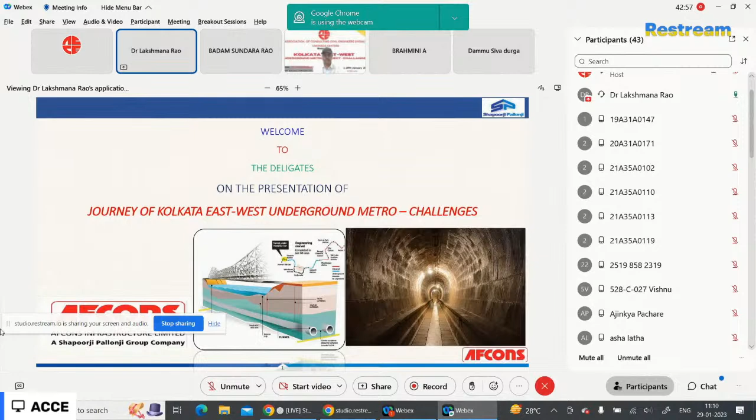This is one of the challenging projects which we have executed at Afcons Infrastructure. I will take you through a brief overview of the project and the challenges which we have faced and how we have overcome the problems.

The flow of the presentation will be the introduction of the project, the geological conditions along the project alignment, and various challenges experienced during construction of India's deepest metro station. We also experienced challenges for the tunneling below the Hooghly River, which is the first kind of project in Asia, and we executed one of the deepest mid-ventilation shafts just beside the Hooghly River. There too we faced some problems that I will touch upon, and I will conclude with the final outcome.

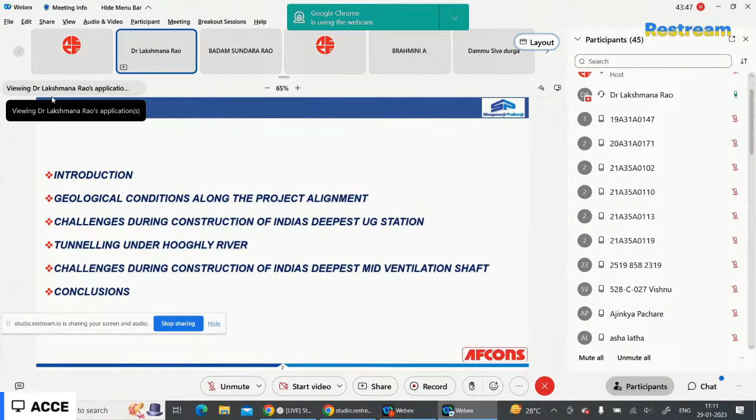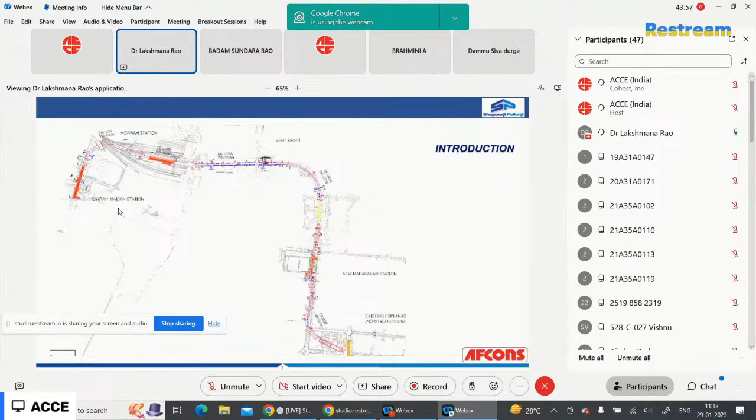If you see the project, this is the alignment in our package, which starts from Howrah Maidan to Esplanade station. This is the first scope of the project, which covers a tunnel of 3.8 kilometers each, meaning the total length of the tunnel is around 7.6 kilometers, comprising 3 stations.

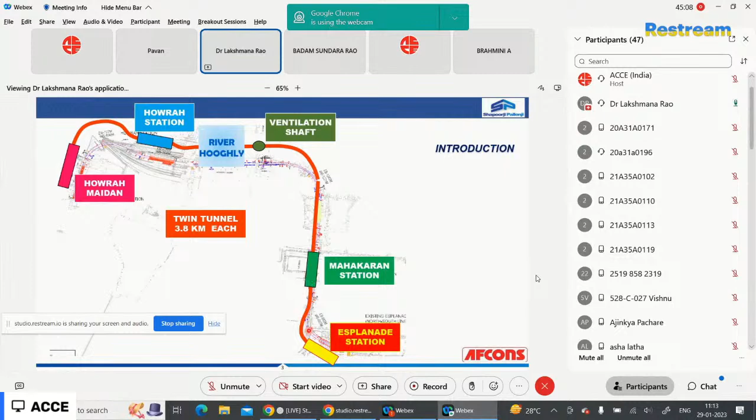It starts from Howrah Maidan, which is a very crowded area, and passes through a railway track coming to the Howrah station. Then after the Howrah station, it passes through the Hooghly River, and you can see the circular shaft, which is the mid-ventilation shaft created for emergency evacuation, because the tunnel length from Howrah Maidan to Mahakaran is far, so we needed an emergency evacuation shaft in between. The third station is Mahakaran station, and from there the tunnel goes to Esplanade. The station of Esplanade is not in our scope, but the tunnel between Mahakaran and Esplanade is our scope. So this is the brief scope of the project.

Now I will give a brief introduction of the profile. This is one of the most challenging projects we have executed, and it has great national and international attention because this project connects Howrah and Kolkata. If you are aware of Kolkata, there is only one bridge connecting Howrah to Kolkata, the Howrah Bridge. There is another bridge constructed recently that also connects Howrah to Kolkata, but the major connectivity is the Howrah Bridge.

So the rest of the people who want to cross generally use water transport between Howrah and Kolkata. This project, being underground, will connect Howrah and Kolkata, and that gives a lot of attention to this project.

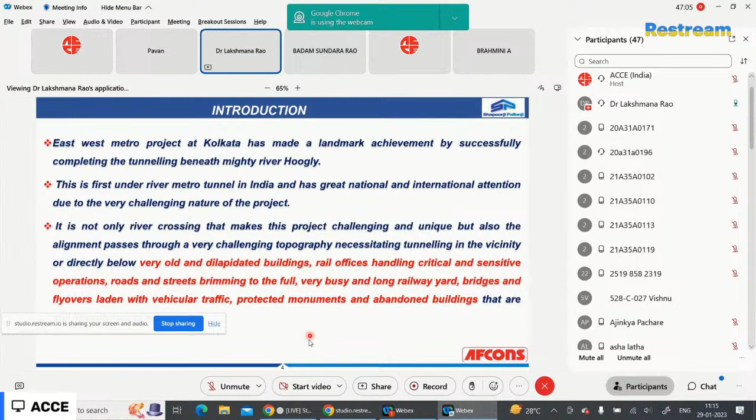Besides this tunnel crossing below the Hooghly River, there are other challenges like old dilapidated buildings. Kolkata is one of the oldest cities in India, with buildings having a life of more than 70 to 80 years. There are also heavy old railway office buildings and railway yards. Kolkata is one of the busiest railway stations, so we need to cross the tunneling below the railway track without affecting train movements. There are many flyovers and bridges below which our tunnel has to pass, and in a few locations there are heritage structures that we needed to protect during tunneling. These are the various challenges.

As I mentioned earlier, this is the first underwater tunnel which was executed in 67 days, against our planned number of days. I will explain how we shortened this time in my subsequent slides.

This is one of the deepest metro stations, having 4 floors. In general, any underground metro station has only 3 levels of slabs, covering the roof slab, concourse, and base slab. Whereas here, they created an intermediate slab for property development, because this station connects to the existing Howrah railway station, and they wanted additional space for property development. That's why this becomes the deepest metro station.

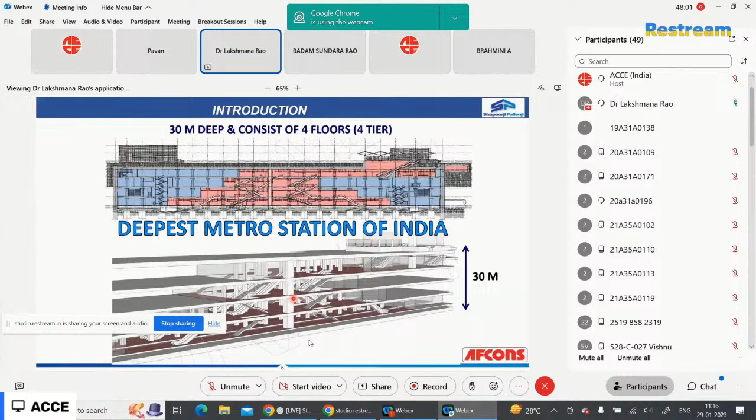Also, as I mentioned in my previous slides, this is one of the deepest mid-ventilation shafts, around 45 meters from the ground level, which we connected. The major challenge is not only the depth, but that it is very close to the river. So there is always water flow from the river to the shaft during construction activities, creating a challenge from the water egress point of view. I will explain how we overcame that.

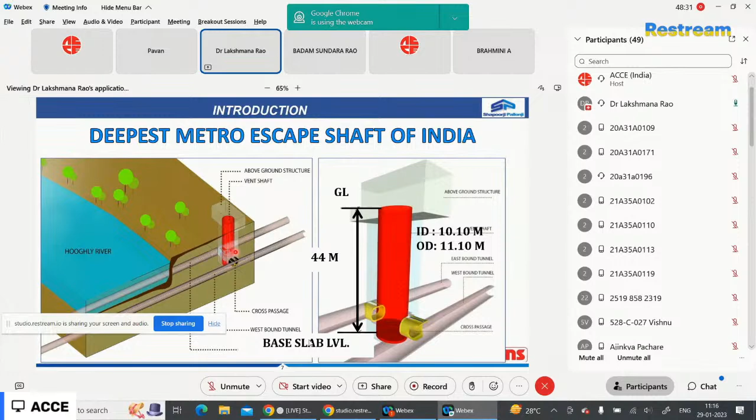Now coming to the geological profile. This is the broad geological profile, which covers very soft soils. Kolkata's groundwater table is almost close to the ground level; around 2 to 2.5 meters from the ground you will find water. Most of the soil is very soft because it is alluvial in nature.

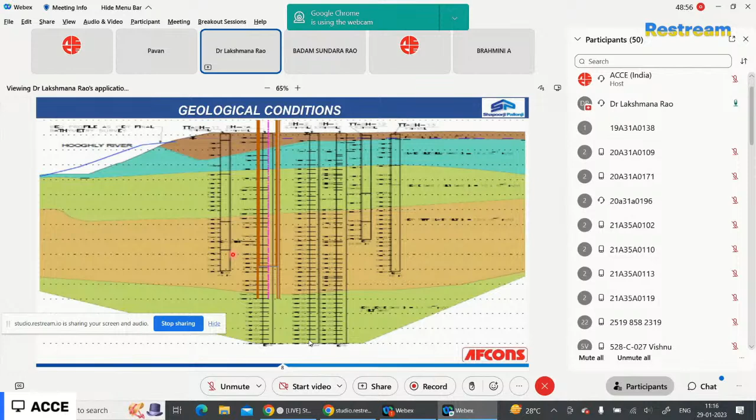Based on the tender stage investigation, we classified the soil into different layers. The first layer is made ground, almost filled-up soil in loose condition, from a depth of 1 to 5 meters, where all the building foundations rest. In the older system, there was no concept of deep or pile foundations; most foundations use strip footing with brick or masonry and no concrete, resting on the top 1 to 5 meters of soil.

Layer 2 is predominantly silty clay and clay silt, below layer 1, also soft dark grayish clay. The SPT N values range from 2 to 8 up to a depth of 18 meters.

The 2 to 8 SPT - we know that if the SPT value is less than 10, we generally call it very soft or loose soil. So here, from 3 to 18 meters, is soft soil through which we need to do our tunneling, and we have to experience a lot of settlement during tunneling because of the soft nature of the soil, but we need to protect them and move further because the alignment is fixed.

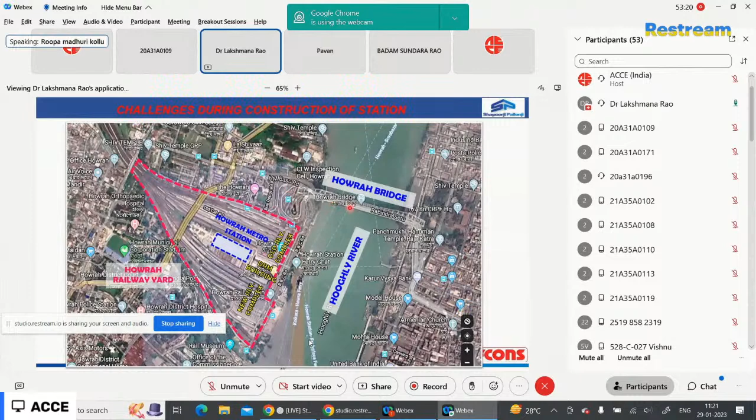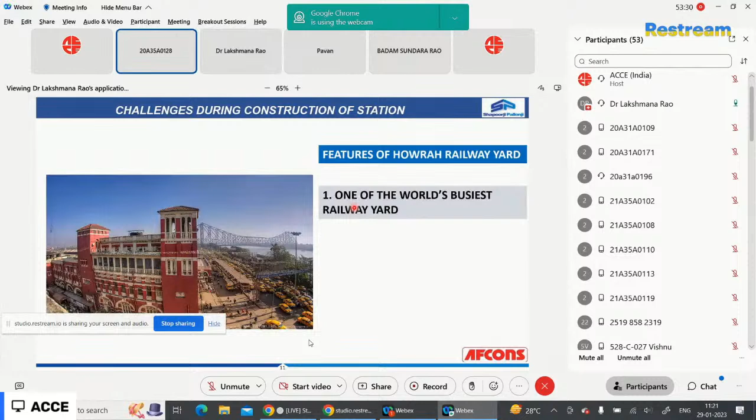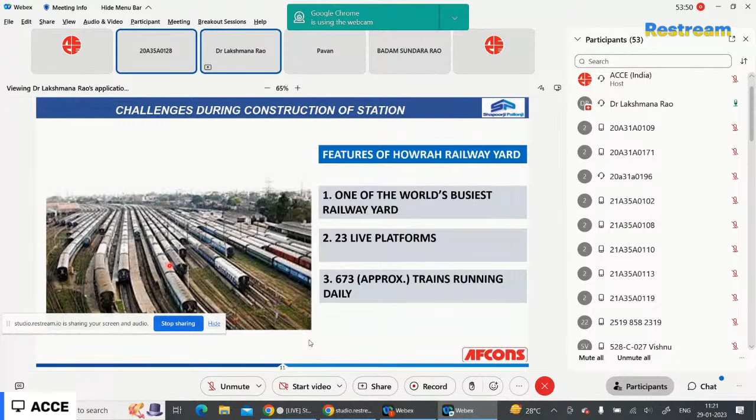Now let's see the features of the Howrah railway yard. This is one of the world's busiest railway yards, with around 23 live platforms, and around 673 trains running in a day. Imagine 673 trains means almost every minute a train is coming into the platform. More than 10 lakh people use the railway station per day, so the overall footprint per day is around 10 lakhs - you can imagine how crowded it is.

Now let's see the challenges we faced during construction of this station. The main feature is the diaphragm wall - this is the station box. These outer walls we call D walls, which will be permanent walls for the station box. These are the tension piles, barrettes, generally used for load carrying capacity during construction, and also for flotation resistance check when the station is floating, so these piles serve multiple purposes.

The depth of the diaphragm wall is 46 meters with 1.5 meter thickness. The barrette is 60 meters deep - these piles, where my cursor is moving, have 1.2 meter thickness. The piles are around 62 meters deep with 1.5 meter diameter. So all these piles and barrettes come into this dense sandy soil layer where we have a challenge in boring. As I mentioned, the depth of excavation for this station is approximately 33 meters.

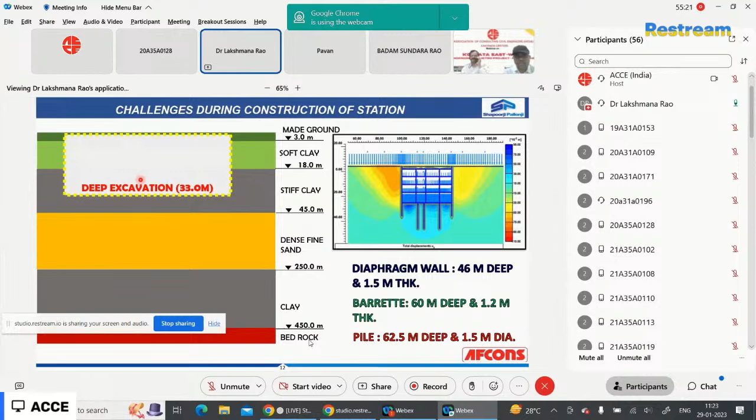So for this, the first one is that we need to make the D-wall. For the D-wall, we need to prepare a cage, like how we make the pile cage for the RCC pile. For the D-wall also, we need to make a cage.

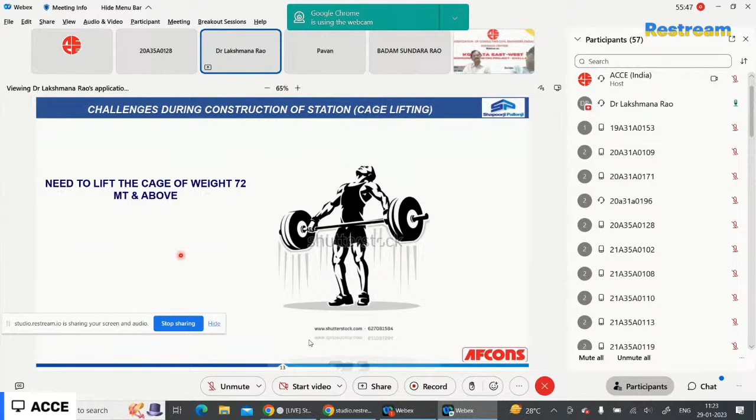For a cage of this depth, as per the design, the weight comes to around 72 metric tons. So imagine lifting 72 metric tons is a very big challenge. We also need to complete this activity within a short time cycle because the soil tends to collapse. As I mentioned, the soil is very soft, and whenever you do the grabbing, it will try to collapse. So we need to complete the activity within the time cycle.

And also we should not disturb the platforms which are existing. You can see this photograph. This is the Howrah station, Howrah metro station, which we are going to construct. These are the platforms, so we should not affect the operations or live traffic. We should complete our construction of the D-wall.

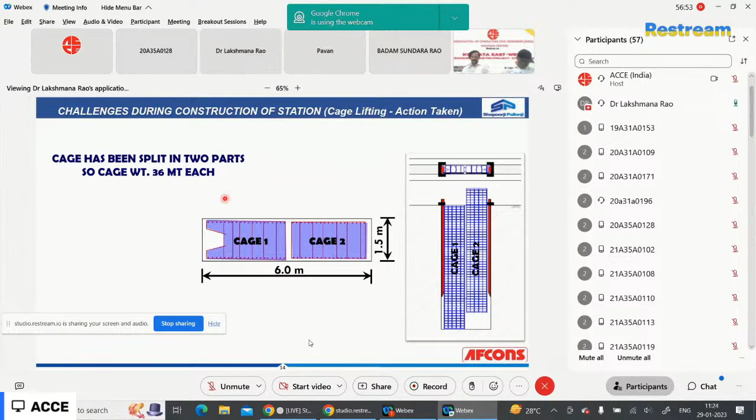So this is the typical D-wall. What we have done is, for this total 6 meter width single panel, we have done the grabbing as a single operation. Whereas when we lower the D-wall cage, we have split it into two parts, so that the weight becomes 36 tons each, which is easy to handle. We also decided to lift it as a single go.

Generally, what happens is sometimes we do horizontal splitting. Most of us know how pile foundations are constructed. When the pile length is longer, we make a cage of around 12 meters, then lower it, then put another cage and weld it. This is called splitting of the cage.

In the D-wall also, we can do it the same way. But if we do that, it will again take time for welding and all. So we decided that we will lift it as a single go. That means the D-wall depth is completely 46 meters.

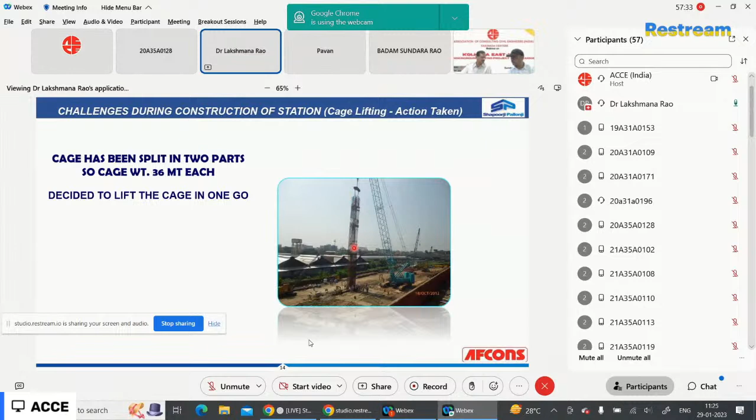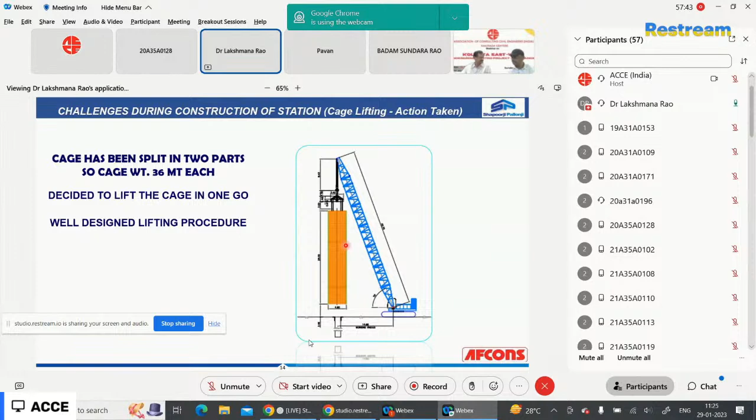So we have a well-designed procedure for lifting a single cage. For that, the required cranes have been deployed. And for the lifting procedure, you can see we have used 3 cranes to lift this - one here, another holding the cage at the center, and the third at the bottom.

Generally, what happens is we lift the cage by putting the supporting system at the top as well as the bottom. If we do that, due to the self-weight of the cage, the cage can deform. So to avoid that, we have used a third crane to support the cage and minimize the deflections.

We also selected the position of the crane such that it should not affect operations. You can see we have used only this portion of the crane's movement, and the crane is not allowed to rotate in this direction because these are the platforms. So we have the movement of the crane at this position, and here also, initially when train operations were not happening, we used to move the crane here and then we had to stop it.

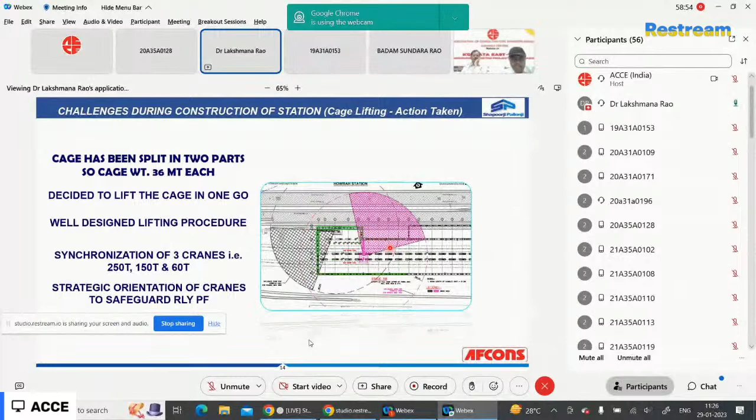Also, when we have done this complete grabbing as a single operation, then when you lower the 2 parts, it is not necessary that the cage will go straight vertically, because this trench is filled with polymer. Due to the buoyancy and all, this cage can move laterally and go inclined. To avoid that, we have used a steel pipe in the center to guide this D-wall cage to go vertically down. That way we have managed lowering the 2 cages in a single grabbing, which has helped us reduce time and also improve the quality of the work.

So these are a few pictures during the lifting and installation of the cage.

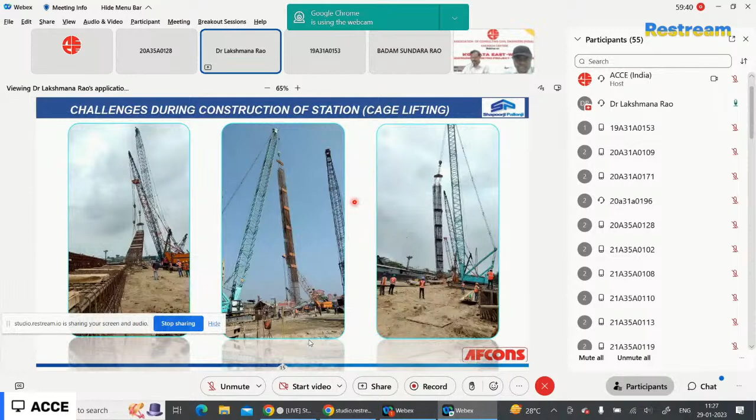Now the problem is another one - the lifting of the stop end. Because if you see my previous slides, these outer 2, we call them stop ends. Because once we do this grabbing, till we do the cage lowering and concreting, the surrounding soil should not collapse into the trench. To do that, we provide the stop ends, which will temporarily retain the soil. As soon as we do this concreting, we need to lift this stop end, which is nothing but a casing pipe, similar to that used in our piling.

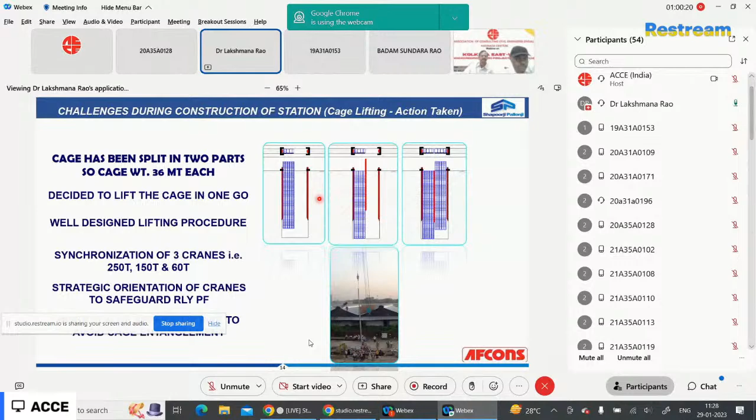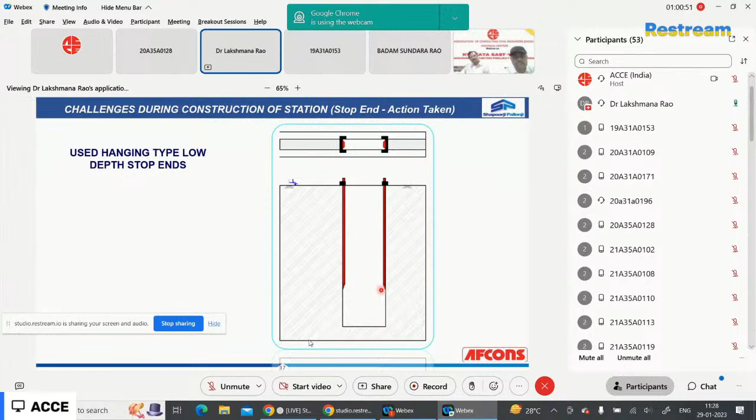Imagine lowering a 46-meter casing and lifting it back—that required a huge force to remove the stop ends. So what we did was not lower the stop end completely to the bottom, but limited it to a depth where we found stiff soil. This helped reduce the weight and the resistance between the stop end. We also used hanging-type stop ends, which you can see here as two circular pipes creating a hollow section, into which we inserted pipes.

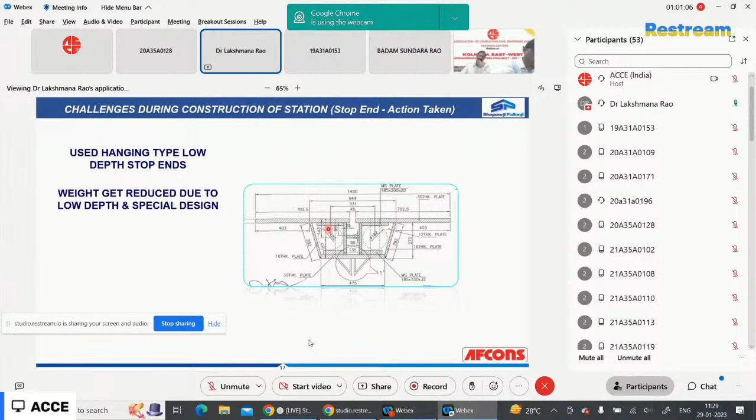Then, instead of lifting the stop end immediately, when we move to the next grabbing—since this D-wall is a continuous process, one panel completed while grabbing continues on the right side panel—we used those pipes shown earlier and laterally hammered them. Because the soil was removed and had loosened, it became easy to remove the stop end. This is the process we established to reduce the force.

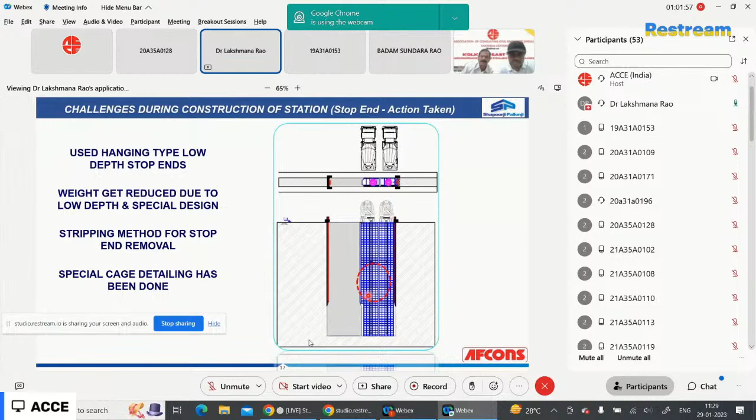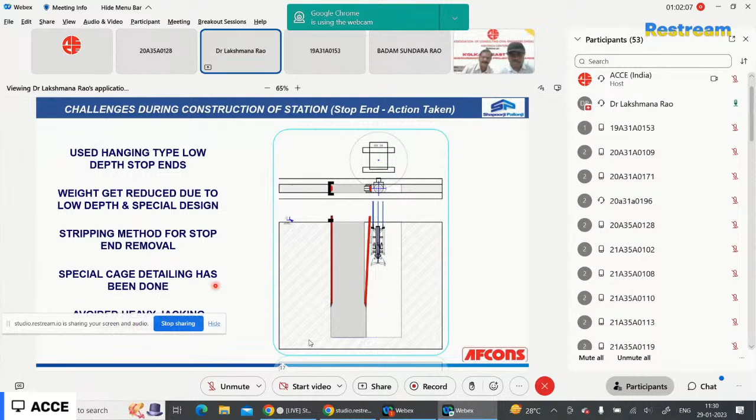We also made special cage detailing at the joints to reduce water seepage, because our station needs to be water-tight and durable for 100 years. With this approach, we avoided the heavy jacking arrangement that is generally used for underground metro projects.

In such cases, we generally provide GFRP—glass fiber reinforced polymer. But no manufacturer is available in India, so we need to import it, which takes a lot of time as well as cost.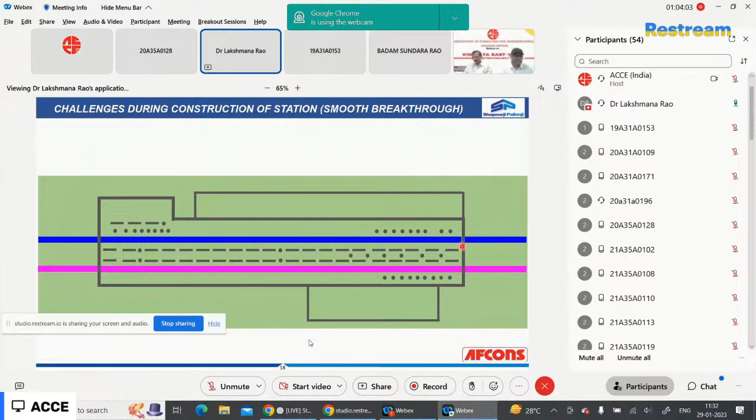Because the tunnel has to bore through the station, by the time the TBM reaches the station, we haven't completed the entire station box—only the D-walls are completed. So the TBM cuts through the D-wall and continues moving out of the station box.

In this area, we used these soft-eye panels as shown in my previous slide—we used thermocol, which is readily available, made a frame, and installed it in the D-walls. So instead of conventional reinforcement or GFRP, we simply used thermocol with a supporting system while casting the D-walls, making it easy for the TBM to cut through and move forward.

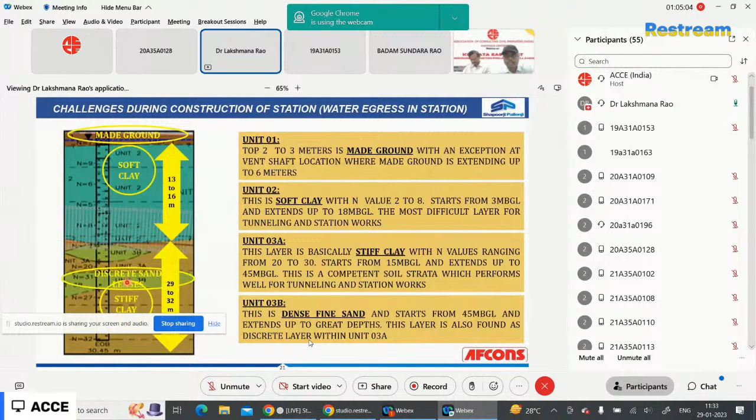Now the major challenge we faced in the station was water ingress during construction. As I mentioned earlier, within the stiff clay there are pockets of sand lenses containing huge water bodies. This is what happened when we encountered the geological profile at the Howrah station specifically.

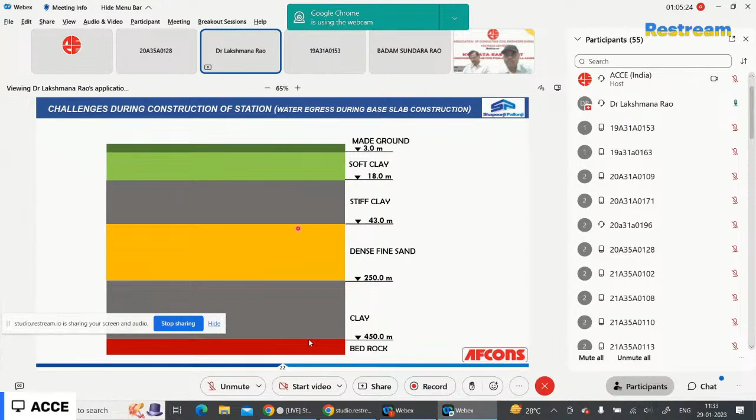You can see the soft clay, stiff clay, and dense fine sand layers—our station box predominantly sits in the stiff clay, whereas our D-walls, barrettes, and tension piles go into the dense fine sand. This is the schematic view of our station box excavation.

Due to this dense fine sand, there is a confined aquifer applying upward water pressure. As I mentioned, the water table is almost close to 3 to 5 meters from ground level, and since it's close to the Hooghly River and this layer connects to it—something we hadn't anticipated during the investigation stage—it created a lot of hydrostatic pressure on the base. We know that in terms of geological parameters, this thickness of clay layer may lead to heave.

So this is the groundwater table, as I mentioned, which is almost 1 meter from the ground level. Now see this circular portion where I marked it. This is critical, because whatever the upward force is coming, the downward force is not sufficient. So at this junction, the buoyancy effect is acting more.

So when you calculate the resistance, the dead weight versus the upward pressure, which is less than 1. That means the moment if I excavate up to this level, this soil will collapse and all the water will come into the station.

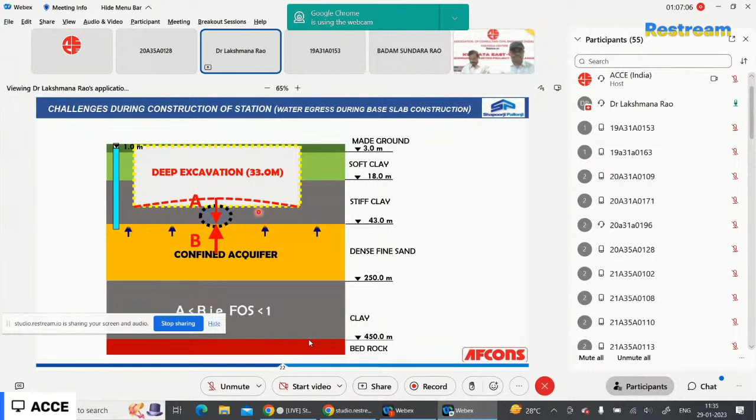So this is what we have in our design assessment initially. So to overcome this, as I mentioned earlier, heave will form like this and the soil will fail and collapse. So to overcome that, we have designed dewatering wells, which will dewater the groundwater so that the water table can reduce and the buoyancy effect can be minimized.

So for that, we have installed 18 dewatering wells and started pumping. The dewatering has been done almost 6 to 7 months continuously, but not a single meter drop of water we have observed in the bore wells.

So we keep on dewatering, but there is no drawdown expected. We were surprised why it is happening, because we have used pumps of almost 15 HP, 20 HP capacity, but still the water table is not reducing.

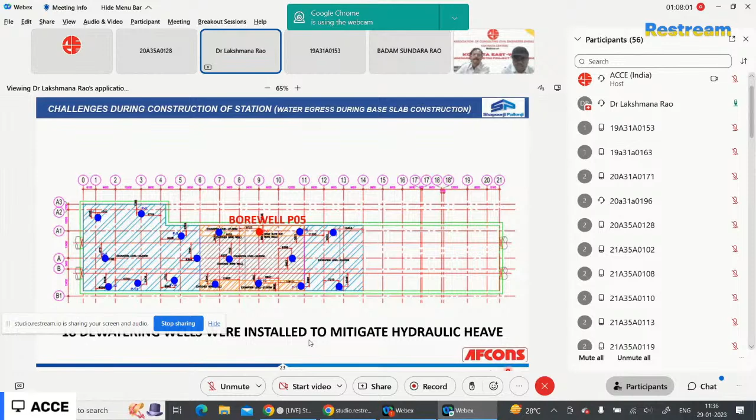So we decided, okay, let's go ahead with the construction. Then we started excavation and we have completed the concourse slab. Then we found that once the excavation goes below the concourse, it will be a problem for us. So this is the lower concourse level and this is our base slab level.

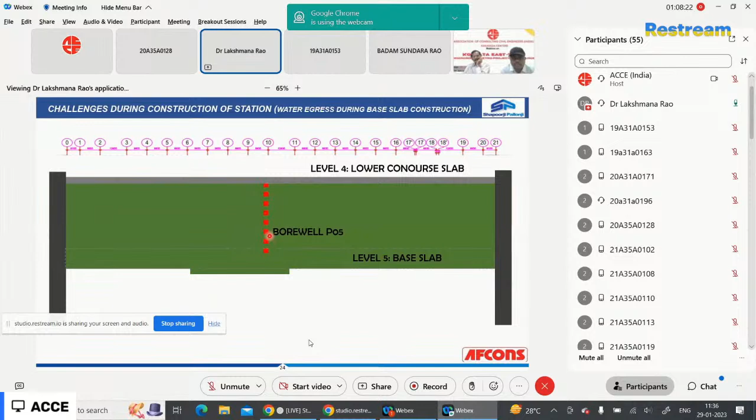So this is the indicative borewell which we have used for the dewatering. We have done the excavation up to almost close to the base slab level. Then we have gone for further excavation.

Then what happened? Suddenly there was a water egress, and this is the condition of the station. The entire station is flooded. The water ingressed suddenly from the bottom as we expected, and it flooded the station completely.

So immediately we don't have any other option of what to do. There is no further thought process. So immediately we backfilled with concrete and brought it back to the original position. So this was the challenge.

So now we have gone back to the assessment of why this sudden water ingress happened. We carried out a technique called RCA analysis. In this we found that the bore wells failed because we kept on dewatering, but there was no drawdown expected. So what could be the reason? One reason could be high water flow, and another reason could be incorrect permeability estimation.

Generally, we always calculate the laboratory permeability as vertical permeability. But in soils, there are two kinds of permeabilities: one is vertical, another is horizontal. In this case, the horizontal permeability is higher than the vertical permeability.

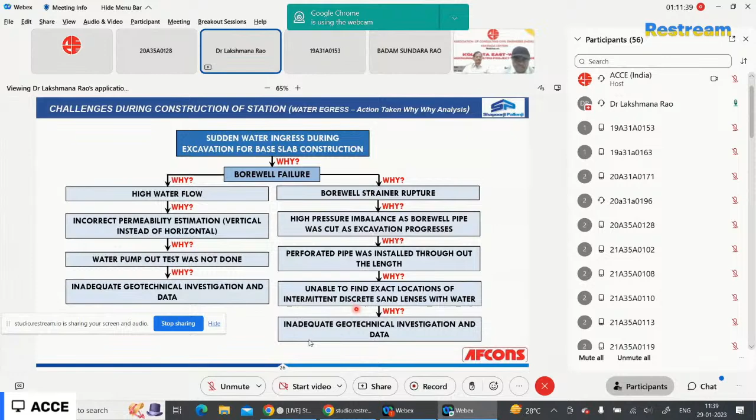Then we have carried out almost 12 to 16 boreholes in and around the station box. We did detailed soil sample collections and tested them in the laboratory for various parameters. Then we made the final geological profile assessment.

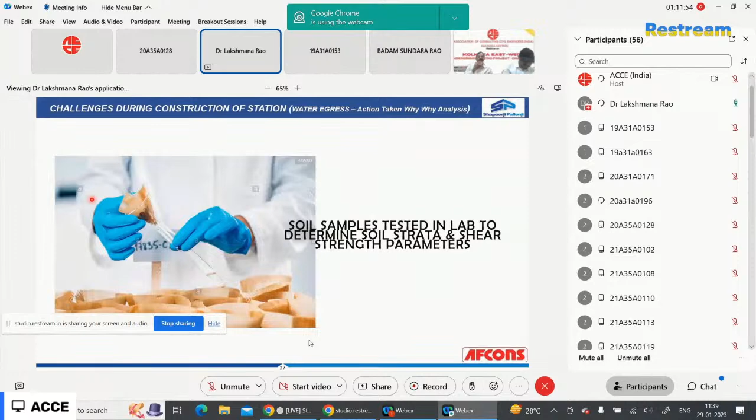If you see here, earlier the bottom of stiff clay is 43 meters as per the tender stage investigation data, whereas in our actual investigation we found it around 47 meters. So there is an improvement we gained of around 4 meters, which helped reduce the confined aquifer compared to the tender stage. So this is the one identification we have done.

Now we have calculated the factor of safety assessments in both cases. So here it is less than 1.

And also, earlier when we calculated the heave calculations, we had not taken into consideration the shear strength of soil, because there is a bond between concrete and soil. Unfortunately, our Indian codes don't say that you have to take this into consideration when calculating the heave. So we went for international references, and we found in a German code they have given the provision that you can take the contributory shear resistance of the soil while calculating the heave, because if the soil has to heave and fail, it has to break its shear resistance. So that also we have taken into consideration.

With that, we found that the factor of safety is more than 1. We don't require any dewatering wells, because the major problem happens once you do dewatering - all the wells get punctured through this clay layer into this confined aquifer, which has high groundwater recharge. So we decided that no dewatering is required, and we can go with the construction as normally we do.

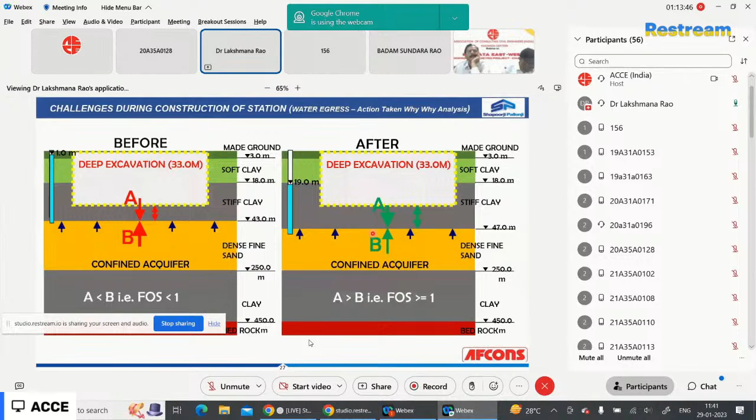So now the challenge is how to plug the bore wells. We have done 18 numbers of bore wells, and through these the water is coming. So we decided to plug the bore wells. To do that, whatever stones we filled in these dewatering well pipes, it was throwing them out because the pressure was too high.

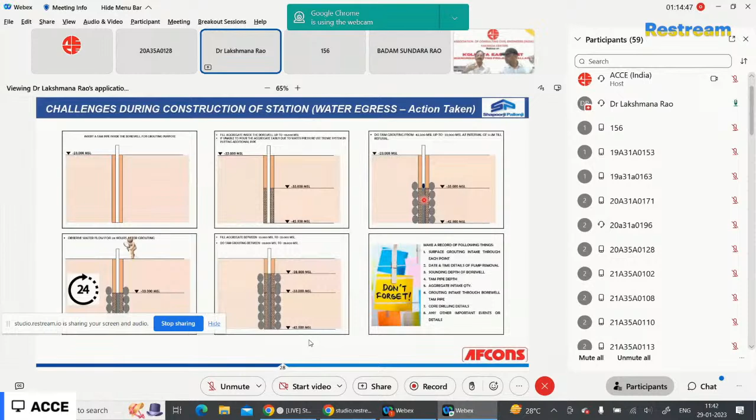So after that, we have started with our excavation procedures. You can see the right picture is the original problem where the water ingress happened. After we plugged all the bore wells, this area is completely dry. The left picture shows that the excavation can be done without any dewatering wells.

So we have taken a small patch of a small portion of the base slab, and we excavated up to the base slab level, and successfully completed the base slab.

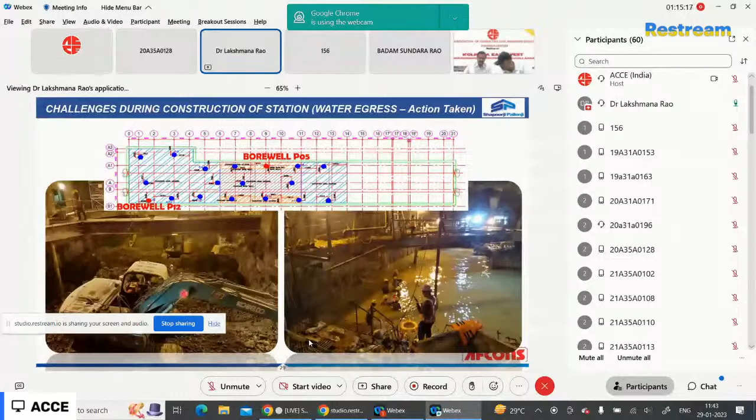Based on the original dewatering system and ground improvement plan, with dewatering wells and all, the planned duration was around 280 days to complete the entire base slab. Whereas, due to this plugging of the bore wells and by re-engineering, we decided that dewatering is not required, so we took up the base slab excavation and completed it within 189 days, which helped us in a reduction of time by 32%. Heavy pumping system was avoided, subsurface drainage was also avoided, and most importantly, the slushy condition at the base slab level was completely eliminated, which helped improve team morale.

So with that, you can see approximately 53,000 cubic meters of excavation, 2,700 metric tons of reinforcement fixing, and 16,700 cubic meters of concrete we have done in almost 6 months time in a difficult situation.

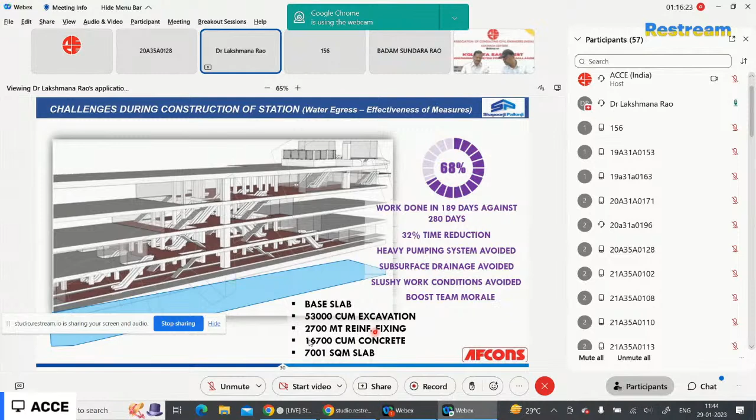Now come to another challenge which we faced at the construction of the mid ventilation shaft.

So initially we thought we would do this as a well sinking.

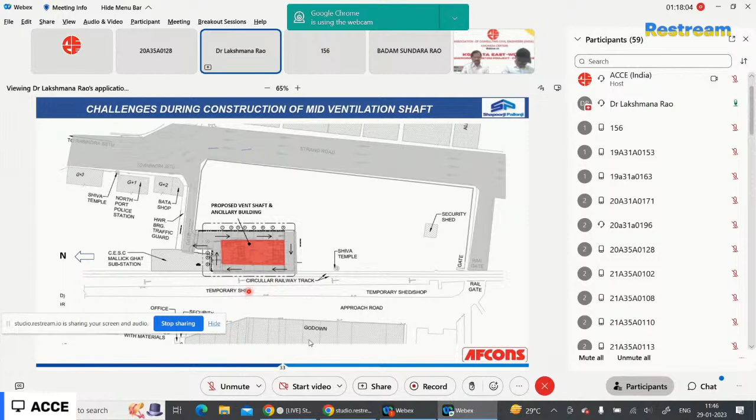So initially we thought we would go with well sinking. But we thought that for well sinking at 45-50 meters deep, we were not sure about the verticality - if there is a small tilt or anything happens, our tunnels will be in problem because the tunnels are very close to this shaft.

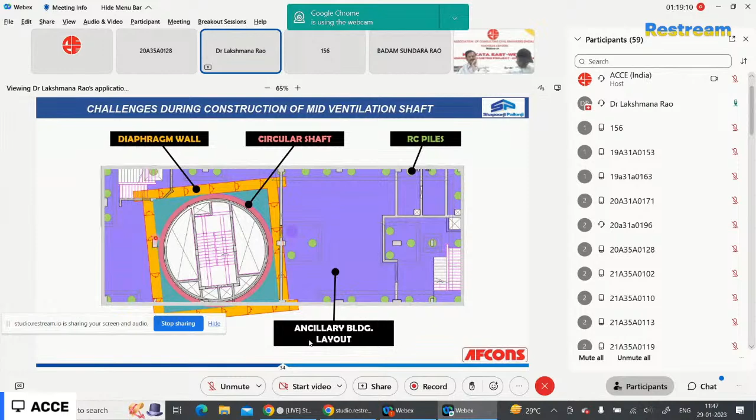However, because that given land was an old factory or workshop, we were unable to do the D walls as planned. If you see, it's a perfect square shape. But during execution, there were some boulders found in this area. We were supposed to go straight but were unable to, so we took the D wall panel backside. Similarly, at this junction there were again boulders, so we were unable to do the D wall till the required depth. So we made one backup panel on the backside.

So with the experience of our station, here also initially our thought process was dewatering wells, but we eliminated that. Instead of making the dewatering wells inside, we made them outside this time, so that it will not harm anything even if we do the dewatering.

Now the challenge is that, as I mentioned earlier, there was a slight gap between the D wall joints, and through this, when we started excavation, water with soil came into the vent shaft and it got completely filled. There was a huge settlement at the railway track on this side, almost 300 to 350 mm. So that was immediately restored, because it's a live track and we cannot stop operations. So we backfilled this shaft till ground level.

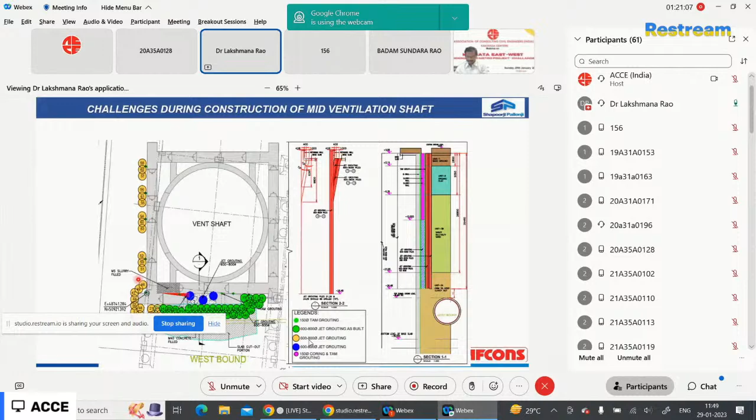Then we established a checklist. One, the pumping wells should be outside only, not inside. And we keep monitoring the standpipe piezometers. These are all the preventive measures we took to avoid problems. We continuously monitored the heave in terms of settlements and monitoring points, and we installed CCTV cameras inside.

We maintained videography at the shaft after every lift of excavation, with minute-level examination of the D-wall face. Whenever excavation happened, we used to see whether the surface was wet or dry. If wet, that indicates water percolation, so immediately we need to apply shotcrete. We also measure the water content and shear strength of the soil for undisturbed samples, and we stocked soil nearby so that if anything happens, we can immediately backfill the shaft.

And we have made one water line from the Hooghly River, so that if any incident happens, we can fill with water also. Since we cannot stack sufficient quantity of soil nearby due to shortage of space, we have stored water instead. For that, we have done a pumping line from the Hooghly River.

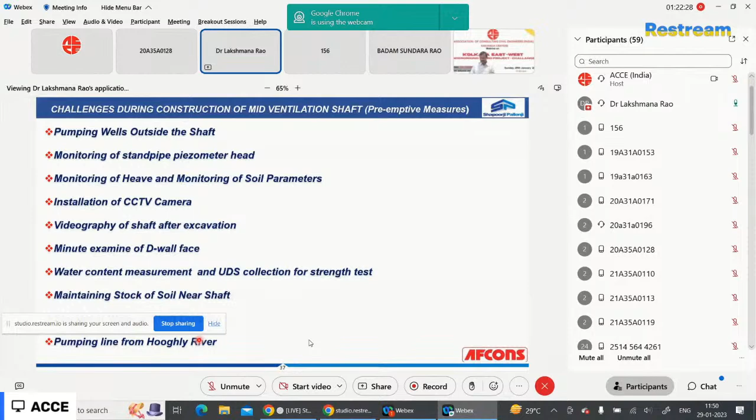So with this, we have started the excavation further. You can see this is the top down view. As I mentioned, these are the lifts of each circular ring, and the condition is dry. We used to check the in-situ shear strength, and also apply shotcrete at every phase of excavation.

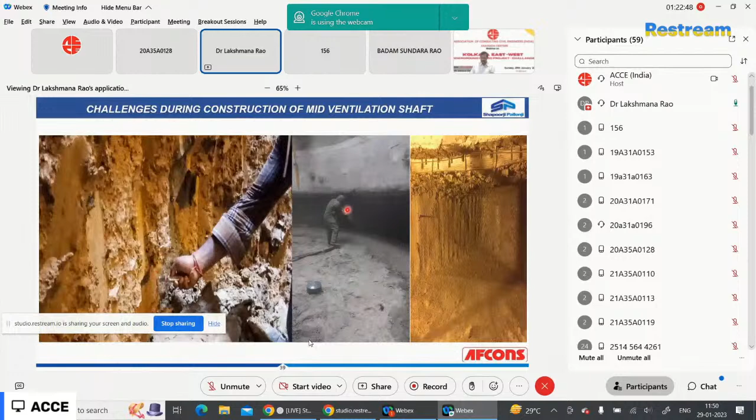Then this is halfway. This is the picture where water ingress happened and flooding occurred. So after that, we established this method.

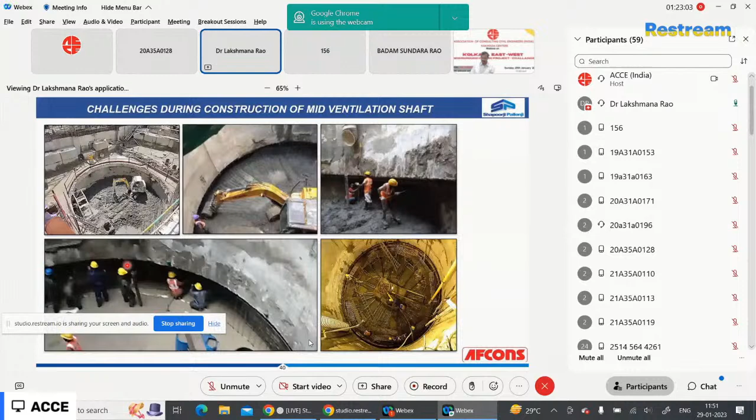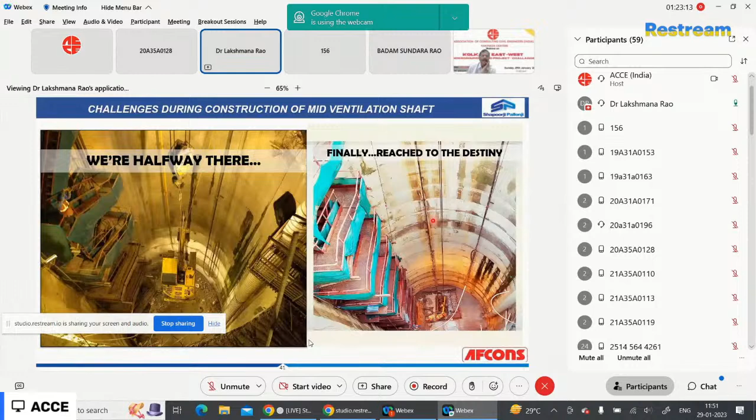Then this is halfway, and this is the completion of the ventilation shaft, 44 meters deep. This was also tweeted by the ministry, because this is the deepest metro ventilation shaft, almost equal to a 15-story building. With these difficult challenges, this was completed.

Now coming to the tunneling below the buildings. See the condition of the buildings. One side we have the challenge of poor geology, as I explained, along with old and dilapidated buildings, and crowded roads and streets. And the challenge is that we need to do tunneling below the Howrah railway yard.

When you do tunneling below ground for these kinds of soils, we used to expect settlement in the range of 35 to 40 mm. No railway will allow settlement of 35 to 40 mm, because if there is differential settlement between the two rails, there can be toppling of the train. And if there is longitudinal settlement, the capacity of the engine may not be sufficient to pull the train. Of course, since the train is coming into a platform, the speed can be limited.

That is the only benefit we got, but settlement is a challenge for us to control. And there are heritage buildings, and flyovers below which our tunnel has to pass, and you can see the traffic on the flyovers.

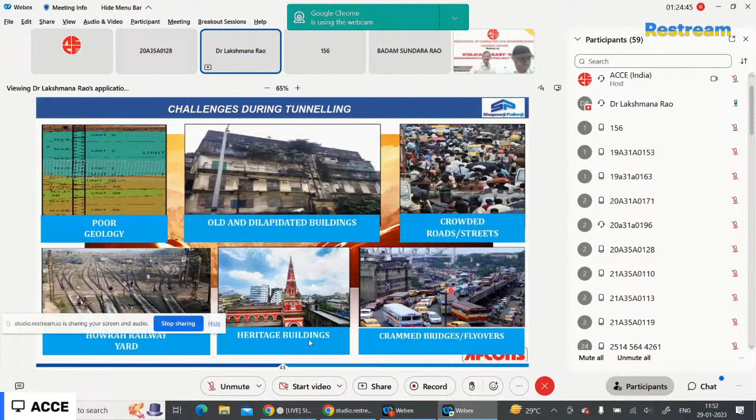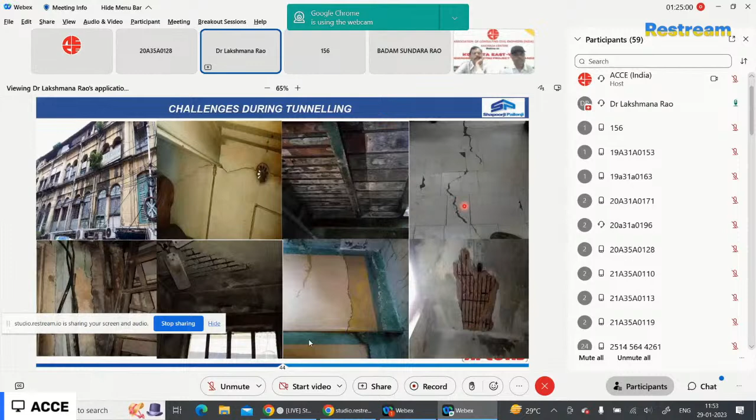So the major challenge we experienced is at Kelvin Court, where all the railway IRS officers used to stay. And as I mentioned, the railway yard and the DRM building, again, it is 90 years old. And then tunneling below the Hooghly River.

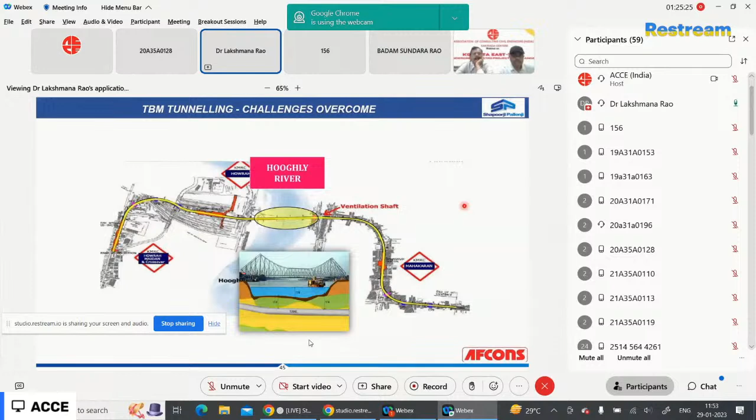Then the flyover—so these are heritage structures. It's not that a small stretch of tunneling is easy for us. Everywhere, for every 100 meters, we have a challenge.

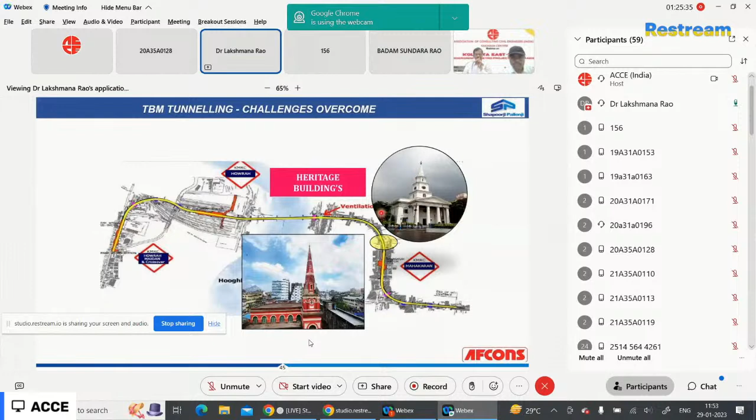So what we have done is establish 5 key parameters. This we have established for tunneling below the Hooghly River also. One is that tunnel flooding condition may happen during tunneling, and if any leakage scenario may happen during tunneling below the Hooghly River—the geology is another challenge. And we decided to do non-stop mining.

For any soft soils, the first and prime importance is that we should not stop tunneling. The moment we stop tunneling, it will lead to more settlements. So we have to ensure continuous mining. For that, we need to have preparation works in advance, and a proper crew deployment pattern. So these are the 5 parameters which we targeted to have smooth tunneling in the soils as well as below the river.

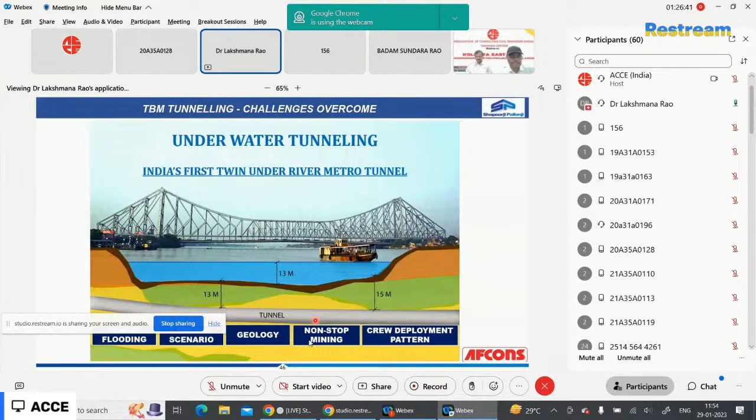In terms of tunneling, we have done the cutter head intervention beforehand, because once we start tunneling below the river, we cannot go for any cutter head intervention. If you do the cutter head intervention, we need to stop the tunneling or mining for 5 days, then the face has to be opened. If you open the face, there may be a chance of flooding into the tunnel.

So we did this before entering below the river, and necessary arrangements were made to carry out the intervention below the river if required. For that, we made steel casings ready, so that if required, we could drive it in and make it watertight. That plan was made, and we also ensured the manlock door should be in proper condition.

And the screw gate operations, because this is one of the areas through which water can ingress. So we ensured that the work chamber pressure should be proper, and these checks need to be done every day, every shift, before the start of operations.

Now coming to the geology. We have carried out additional investigation, and also we have carried out geophysical studies here to confirm the investigation we have done.

We carried out 2 additional boreholes, which confirm that the tunnel is going below clay, in the clay strata, and the permeability is in the order of 10 to the power of -8. So we expect that there will not be any major water inflow in the tunneling if anything happens.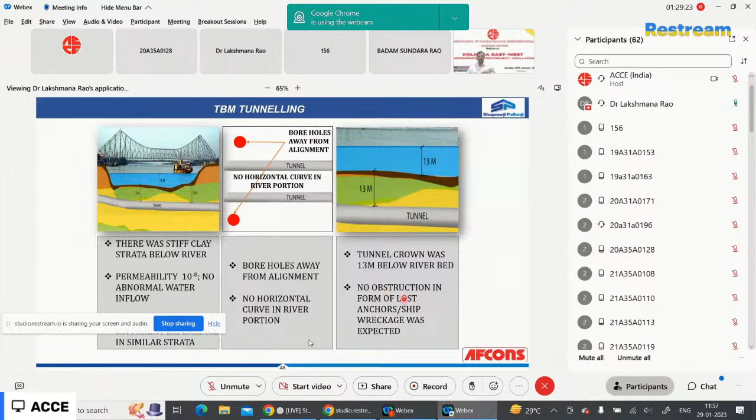Also, in terms of materials, we had an advanced plan that all the tunnel segments required for this 650-meter length were parked near the station, and all the grease and everything required for the rails, for the movement of the muck cars, we parked at the surface, so minimum time was given for any requirement of material. As soon as any material was required, it should be available at the shaft area, so that time can be saved.

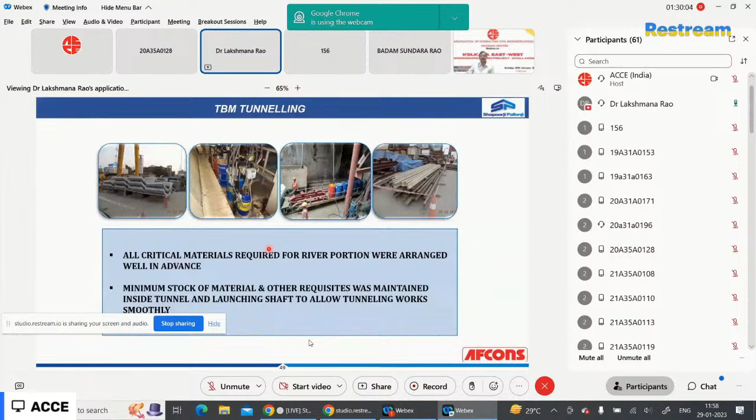Now coming to the crew. We decided that even though it's a little difficult for the workforce, because it's challenging work, we should take some decisions which may be hard. So we decided that there would be no shift change for the crew till crossing the river.

We established all the toilets inside the tunnel, and we arranged food for them for all shifts, but the crew should be stationed in the tunnel itself. We also decided on minimum watch crew inside, so that if anything happens there will be less risk. Standby staff and managers will always be there at the surface as well as the bottom of the shaft.

The screw gate was operated, checked and documented before the start of the shift. The manlock gate was kept free and documented at every stage.

In addition, whenever segment mining was completed and a segment erected, we immediately did the primary and secondary grouting, because this is another area where there may be a chance of settlement and water ingress. Secondary grouting was done after a third ring interval.

Generally, secondary grout is done once we complete around 25 to 30 rings. But here we did not wait for that. As soon as we completed 3 rings, we started the secondary grout. This was a very close grouting process, which helped us tackle the tunneling smoothly.

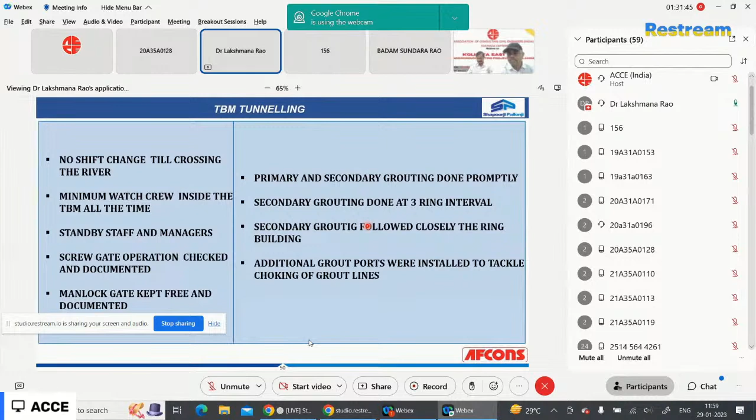So with this, the final conclusions we have drawn are that for any underground metro project, we should have detailed geotechnical investigation, we should identify the critical zones. And it's not only conventional investigation, we should validate those investigations by doing geophysical studies, so that you have confidence that the geological profile we have assessed is proper.

We need to give due importance to the design stage, which is one of the lagging areas in Indian construction. As soon as we get the project, we want to start work at site on day one, but that's not the correct approach. Enough time should be given for proper planning and design, so we can properly establish the construction methods we take up. We also need to give due importance to the methods and sequence of construction.

For any underground metro project, the sequence or methods of construction are very important. We need to assess the structures well in advance, and necessary precautionary measures should be in place. In addition, there should be proper coordination between various departments - design, execution, safety, and the TBM operator. Everybody should be in common agreement; only then can things go in a proper way. With this, I conclude my presentation.

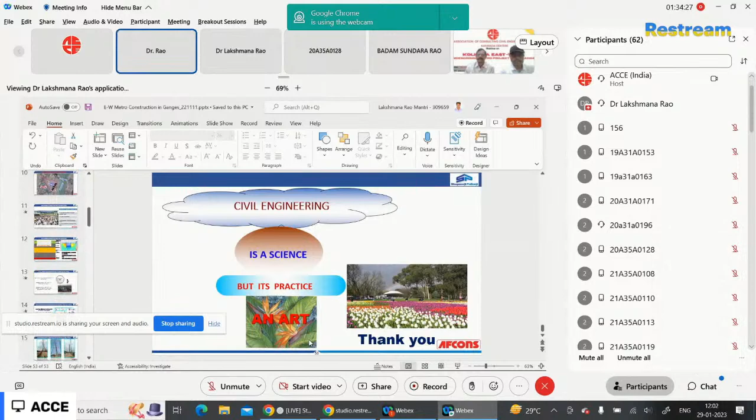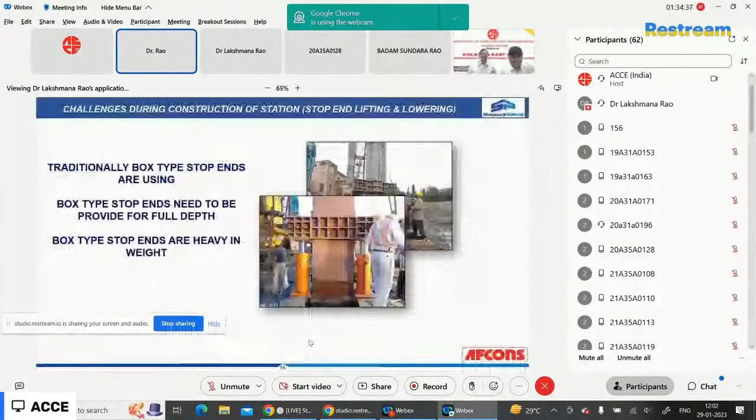Sir, can I ask you to show the live photo of the stop end? Yes, sir. This is the stop end.

Sir, if you can see, there is a groove here. Through this groove, we will put the water bar, which will connect between the two concrete panels for water tightness. Okay, it's very clear, sir.

Sir, while going through your discussion, you mentioned that shear parameters were tested in the laboratory. What is the importance of determining shear parameters in this context? The problem is dewatering. So basically, whatever the case, when we calculate the flotation resistance, like heave resistance, we simply take the dead weight of the soil divided by the hydrostatic pressure.

But you can imagine there is a steel plate - when we apply any load, the plate will first deform. Similarly, clay soil is like a plastic material; before it fails, it has to deform, and it has its shear strength. Unless the shear strength of the soil breaks, it will not collapse. So instead of taking only the dead weight, if we take the shear strength into consideration, we may avoid the requirement of dewatering, because the resistance will be not only the dead weight but also the shear strength of the soil.

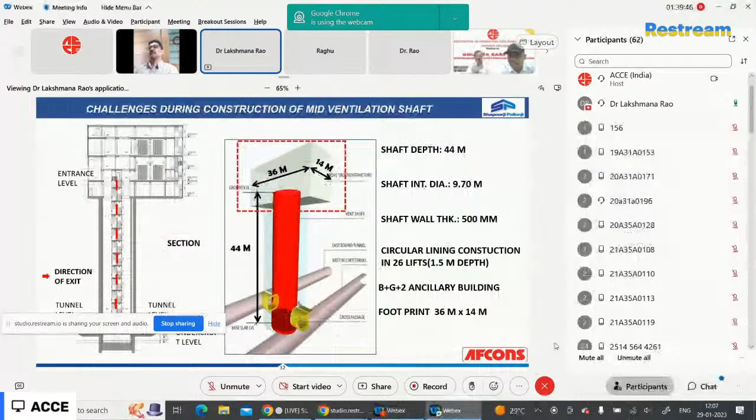Sir, sorry to interrupt. So the consolidation grouting, what you have done, is it from the tunnel inside or from the shaft? From the tunnel inside, from inside of the tunnel. Okay, and you were collecting the material in the shaft, no? Yes, yes. Okay, sir. Thank you very much.

Sir, what are the softwares used, sir? So here we have used Plaxis for all our tunnel designs and all. And for the station box design and all, we have used STAAD Pro and Midas and WALLAP.

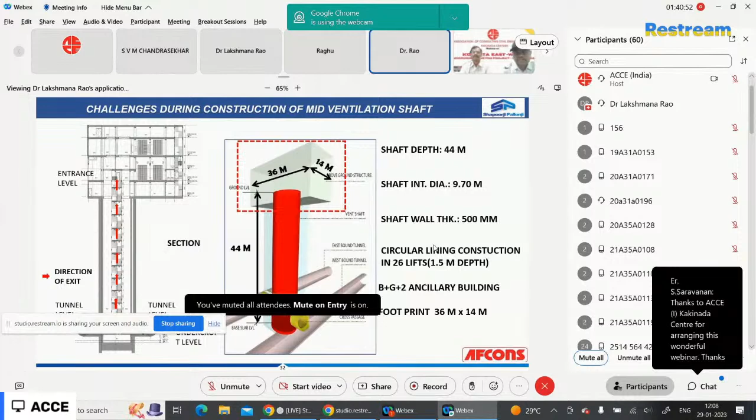Hello, sir. However, you ask. Sir, can I ask you two questions, sir? Yes, sir. Good morning, sir. This is Dr. Lakshmana Rao, sir. I have actually three questions, sir.

Is it that this changed the difficulties that were faced? Yes. The second question is, sir, you have highlighted the... However, your voice is low, sir. Okay, I have some sneezing problem, sir. Now clear, sir? Yeah, it is clear, sir.

Sir, you have highlighted the jet grouting, sir, for the leakage of the D-wall joints and all that. What is the pressure that was adopted, sir? And also, what is the type of grout that was adopted?

Sir, can you repeat the question again? The jet grouted piles you have mentioned, sir. Yeah. For the jet grouted piles, what is the pressure and type of grout?